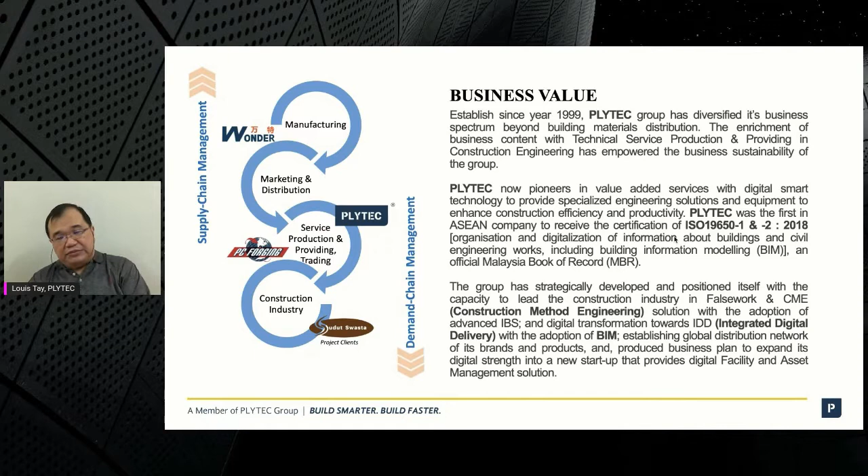We also have our mother company, which started our business 22 years ago, called Sudut Swasta. In this company, we do trading business for building materials. So this is our overall business value.

Just a quick look at it. But today, what I want to talk about is to introduce our core business, our products, and how it links to smart technology, about prefabrication, modular design, lightweight, things like that.

This is our core business, described under different brand names, but all under the Plytec flagship. We have Plytec IBS, which manufactures equipment for formwork, temporary works, and access purposes. Wonder comes under IBS as one of the flagship partners. Plytec Formwork is known for providing equipment and technical service solutions.

Sudut Swasta has been in the market for many years. It's one of the pioneer or established companies, 22 years doing building material distribution and trading. Under Sudut Swasta, we have a very established brand name called Plytec Fencing, specialized in modular fencing, wire mesh fencing.

And then, like I mentioned, we have PC Forging. This is a PPVC, prefabricated pre-finished volumetric construction solution delivery partner. We do all kinds of bridging, providing technical service, accessories, even customized equipment for our partners and clients to do PPVC productions. So we'll talk about it one by one.

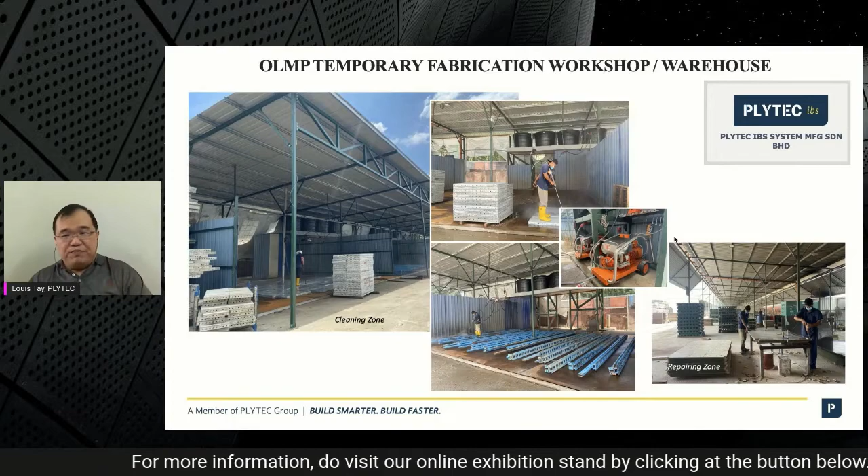Under the whole Plytec IBS flagship, we do multiple services. For example, formwork, SCP, formwork refurbishment, repair, refabrication, recalibrations. We have a full facility and a huge stockyard managing this.

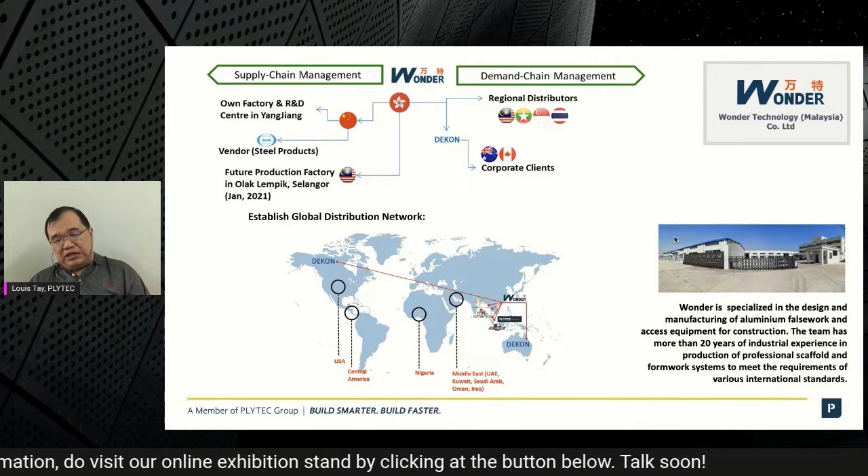Currently, the Wonder setup is in China, and from China we export to ourselves and all over the world. Very soon, by next year, we will set up a production capacity, enlarging the China capacity in Malaysia as well.

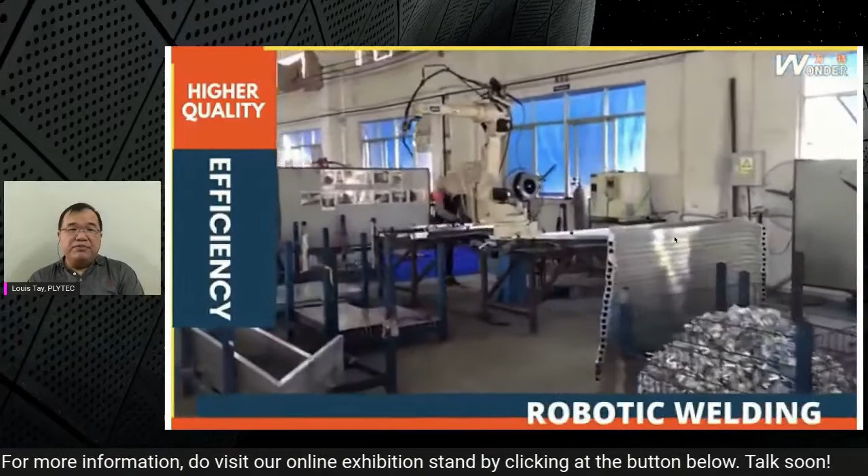The following video is just a view into our Wonder factory. It is a medium-sized factory, however it is highly automated. That is the direction of what we invested in. We are one of the earlier batches in this manufacturing of formwork and access equipment who started into 100% robotic welding.

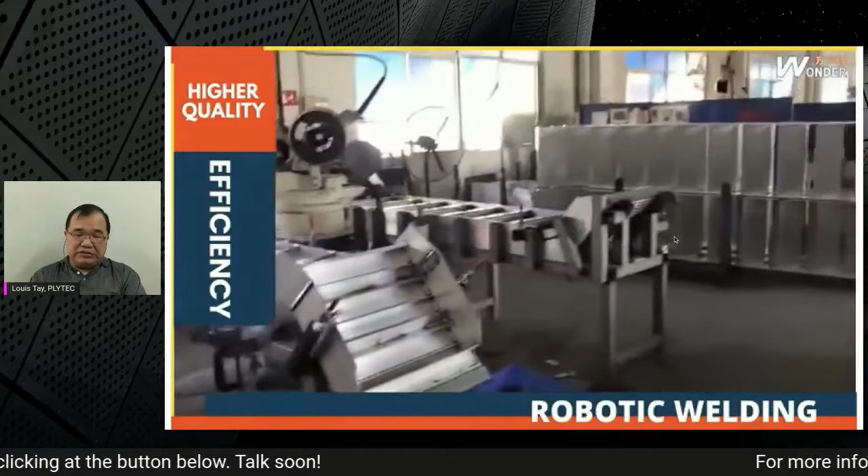This actually helped us to cut down a lot of manpower. Even in China today, due to the pandemic, manpower is a crisis. Even our factory is having a challenge and difficulty finding workers. It is going to be the same situation in the whole world.

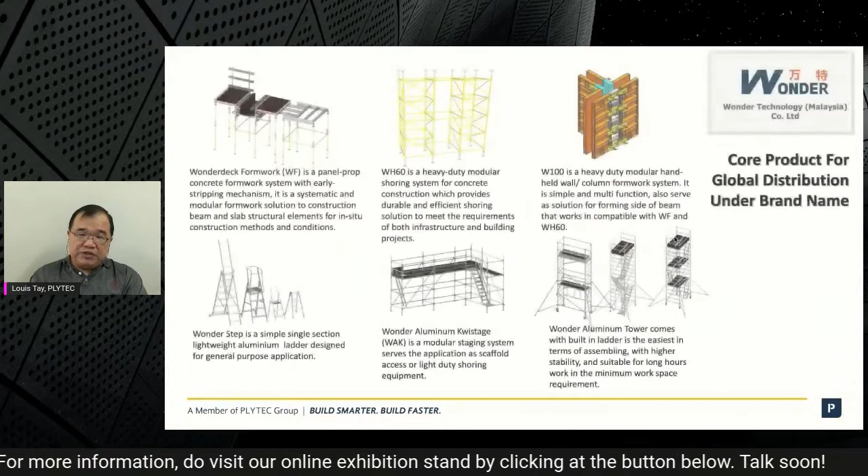Simply because the pandemic opened up new jobs and new job requirements in the e-commerce sector, young people choose to go into that segment rather than going into the conventional business. So all the industry will be facing the same problem.

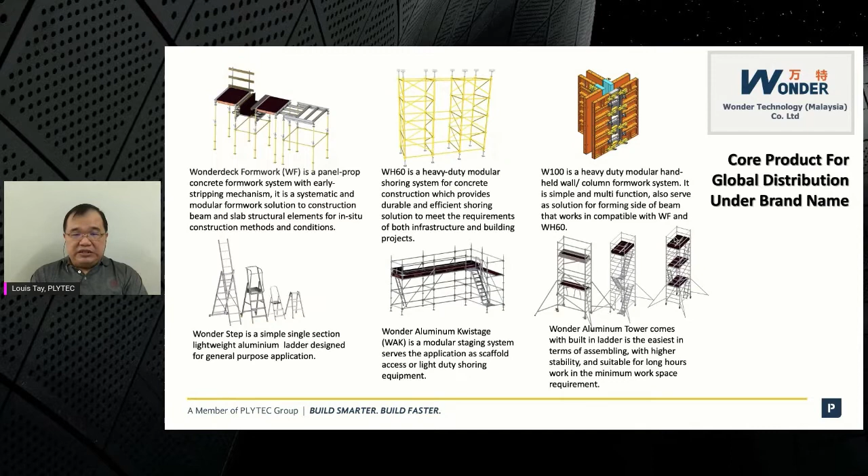It is the intellectual workers we need to support production planning and production supervision. That is the gap we are missing, to the extent that even the local labor group will also be missing, as they have a choice of going into other businesses. This is a situation we will continue facing, including the professional service industry like architect and engineer offices, and also the construction industry. We are not only faced with the shortage of labor, but the mobility of labor at this moment is also very much restricted due to the pandemic.

On the other hand, we are also facing the challenge of young graduates who don't want to choose to go into conventional business, like becoming a trainee engineer, a site engineer, a project executive, that kind of role. They always have a choice of going to Grab car or Grab food instead, because those jobs give them a higher starting pay than a conventional business.

But what they do not know is, yes, you enjoy free working hours and things like that, but it will stagnate at that level. Whereas if you start as a young engineer at 3,000 in a construction or design office, after 3 years you are at 5 to 6,000. With Grab, you can start at 4,000, but after 3 or 4 years it's still 4,000. Not to mention after 10 or 20 years, can you physically sustain that kind of burden doing this physical work?

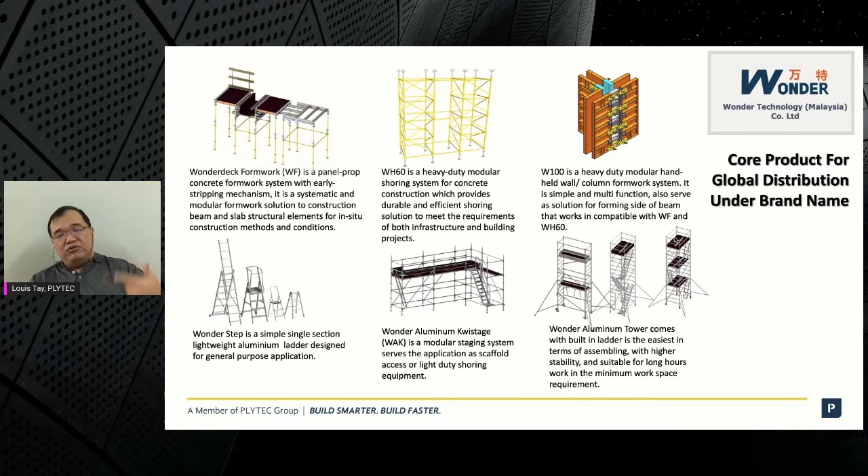So that justifies for us to go into industrialized building systems, to use more technology and equipment rather than labor and manpower. It's more justified for us to have something prefabricated rather than requiring a lot of shop drawing processing and detailing at the production site. Because of the challenges we are anticipating in the future human resource market, we need to overcome this by adopting technology.

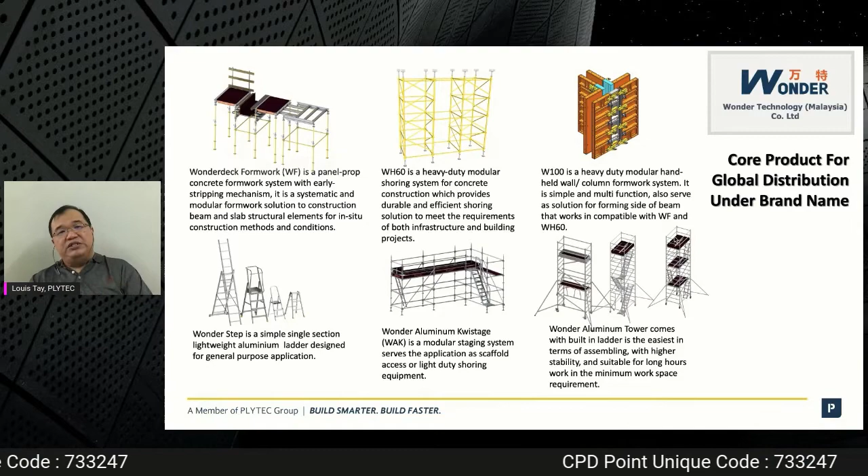These are some of the products we have produced, and the latest, which we did quite well for the last few months, is our solution we call the Plytec K21 Mobile House. It's a prefabricated, lightweight building system, and it is very ideal for construction projects to use as a centralized workers' accommodation.

Currently we have 4 projects in hand. One we are constructing for 1,000 plus capacity, another we are constructing 2,000 capacity labor quarters, another 2 are smaller, and we have completed another 2 recently.

The beautiful part about this lightweight system is that when it is mobilized to site, everything is fixed by dry construction.

It is so lightweight that even erecting a 3-story building involves no craneage. Everything can be put up by some workers. Of course, if you use craneage for 3-story construction, it will be much easier and you'll use fewer workers. But anyway, up to 2-story, we have been putting up a double story in 7 days.

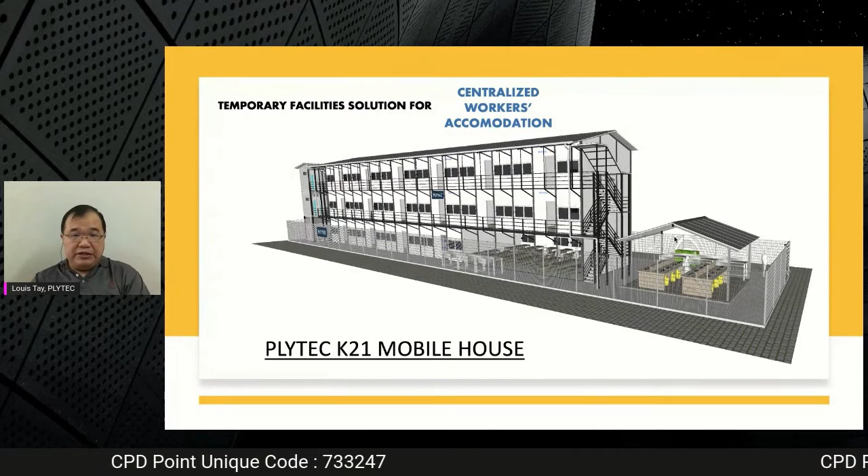Everything I told you just now is under our manufacturing, which is Plytec IBS. Under that, we have our international business, which we supply internationally, called Wonder. Locally, we are more known as Plytec Formwork, and a lot of people have come across us, a lot of projects you've seen everywhere in town carry this name. Plytec is actually undertaken by Plytec Formwork with our equipment and service. So what is Plytec Formwork?

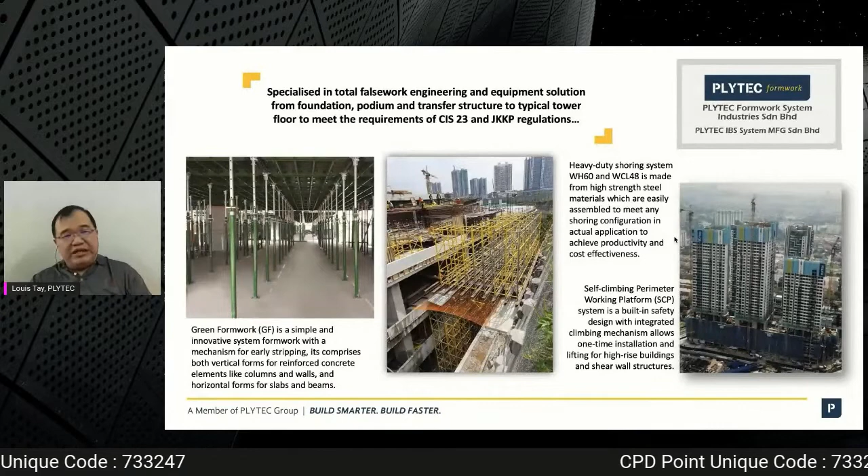We are a company specialized in falsework engineering, temporary works, very much into shoring systems and formwork systems. Our system can also do scaffolding. Over the years, we have done a little scaffolding, but we are capable of doing it.

But what happened is in the last 5 years, the market also saw transitions in terms of regulations and control of scaffolding material being used. Now, as of this year, actually last week, the regulations and standards for the use of scaffold and falsework or shoring have been further strengthened under the revision of CIS 22 and CIS 23, which cover the safe use of scaffold and falsework in construction. These two standards have been tightened and revised.

Last week or two weeks ago, the fourth schedule incorporated this under Act 520. These two CIS carry enforcement power, and are actually listed in the statutory enforcement list of the fourth schedule. So this is something that's going to change. We expect more proper, safer practice of this falsework in the market.

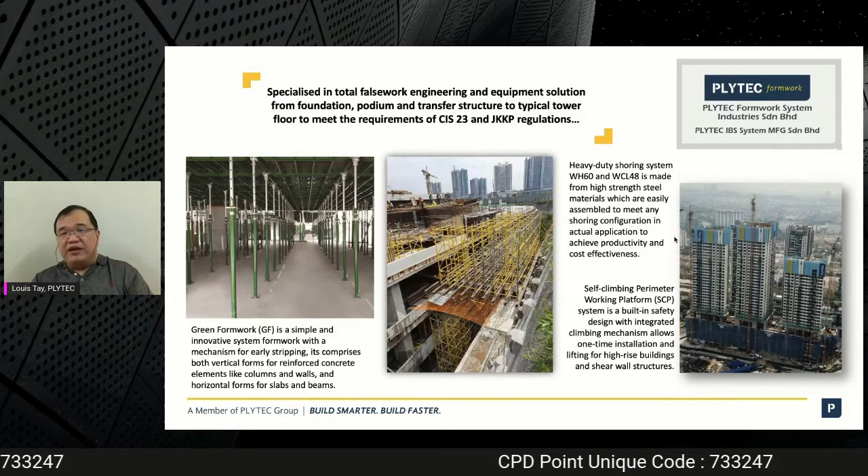I can tell you Plytec is already ahead of it. We are already preparing for this, participating in this very closely. So these are some of the things we do.

This is called SCP. There is also a new guideline coming out by JKKP and Master Builder, and now it's going to be called SCP-PS, self-climbing perimeter protection screen. But in Plytec, we have been calling it SCP for years because we shortened it. This guideline is coming out also.

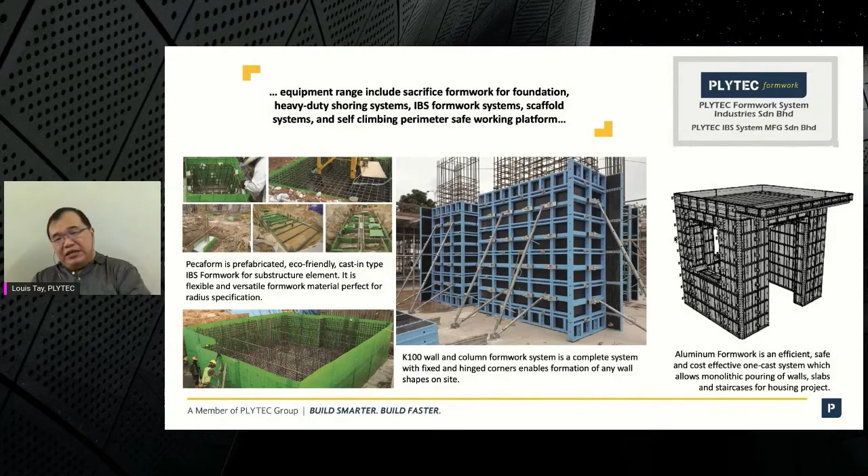So we expect the market will become more regulated, more best practices can be shared, people can do it more productively, and achieve higher safety standards. This is what Plytec Formwork does. We have multiple solutions, many products, and practically we are a one-stop solution center. We call it from toe to tip, from your pile cap to the tip of your tower.

We provide all the formwork and shoring solutions. For substructure, we have left beam formwork, Pecaform plastic reinforced formwork you live in, and it's very fast, gaining popularity also. Then from podium, normally big span structures, we have a very famous green formwork currently, almost used in all the podiums. 50% of podiums will use this kind of formwork system as long as they use a simple flat slab design.

We have been the key player in building transfer floors. We do a lot of transfer floor because it's heavy shoring, requires a lot of engineering, and we are very good in that area. And of course typical floor, most typical floors use aluminum formwork, which we also do. We don't do a big chunk of that market, just a small market share. However, our SCP, we are major. We took the majority share in the market, and we actually do it very well.

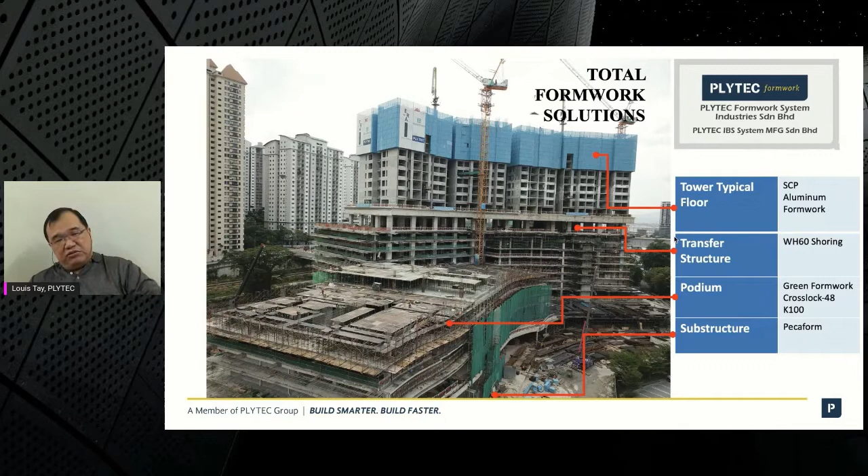So we have our reputation, and we are a trusted brand in SCP and in a lot of our systems. Normally we provide a client a one-stop experience. We deal with everything for them so that they do not need to source here and there. So finally, PC Forging is a delivery partner for precasters who do prefabrication construction, precast production.

So we do multiple solutions. First of all, we do detailing. These are some of the detailing work for jobs we did in the last 2 years, and these are all PPVC. You can see the precast is in 3D formation. We use BIM software to produce the detailing for them and the coordination. So this is one of the services.

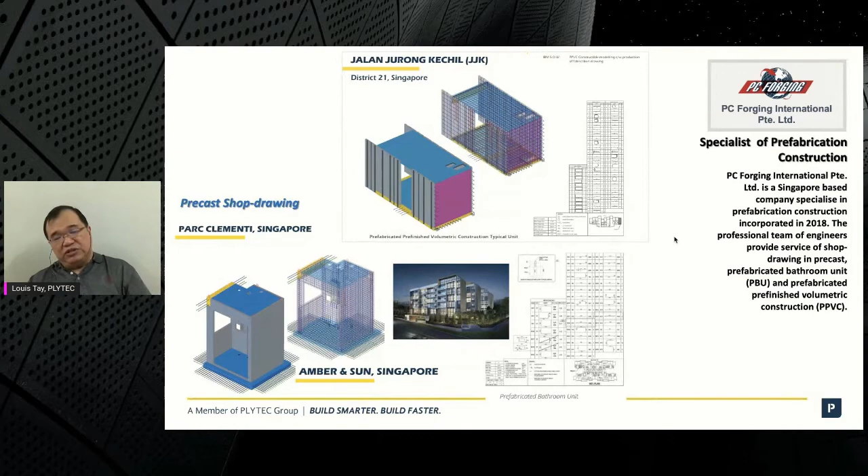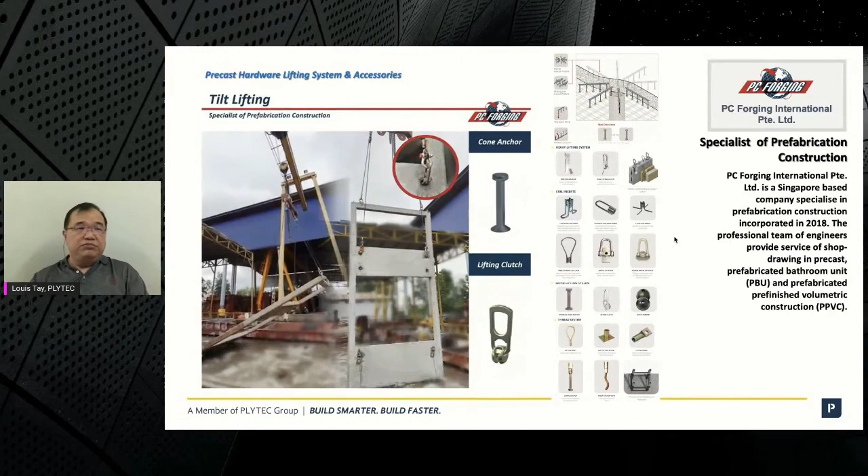But what we do more is actually under PC Forging, we have multiple lifting and connecting solutions. This is what we also do, so we supply this. At the beginning of the PPVC 3D precast, the precaster uses the formwork system that does inverted casting, because the element is casted inverted. It means top down, so it has to be turned 180 degrees over.

In the early days, we coupled with a precaster to help them solve the solution of how you turn a 10 ton to 30 ton 3D precast concrete element over. So we actually designed, constructed, and supplied this equipment. Our first version was P30, up to 30 ton, and then the newer version was P50. So this is some of the things we do. We specialize in this.

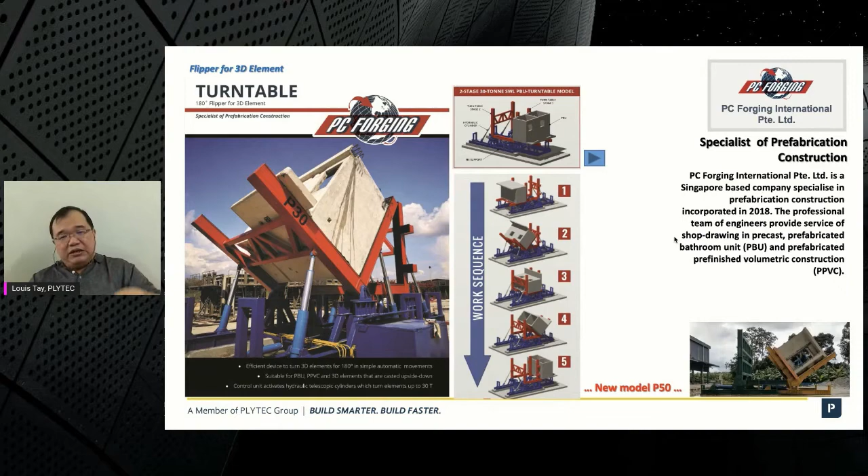We help in the production planning. We provide detailing. We don't do the production. What we do is we solve the production challenge. So this, so far for PC Forging, has been the partners and the people we have been working with.

And of course, this is one of our earliest brands. Plytec fencing, I think it is a well-known brand. Over many years we always took part as a brand by itself in this architects exhibition, but this year we combine it under the Plytec flagship.

So we have multiple solutions. Whatever wire mesh or prefabricated fencing, modular fencing you think of, we have. We even have aluminium fencing. What you see on the right hand side is the more common one, the anti-climb one, installed in the other direction. The other type, which is not that common, is also available. I even forgot the name of this one, what a shame, sorry. So this is also one of our projects. We have multiple solutions.

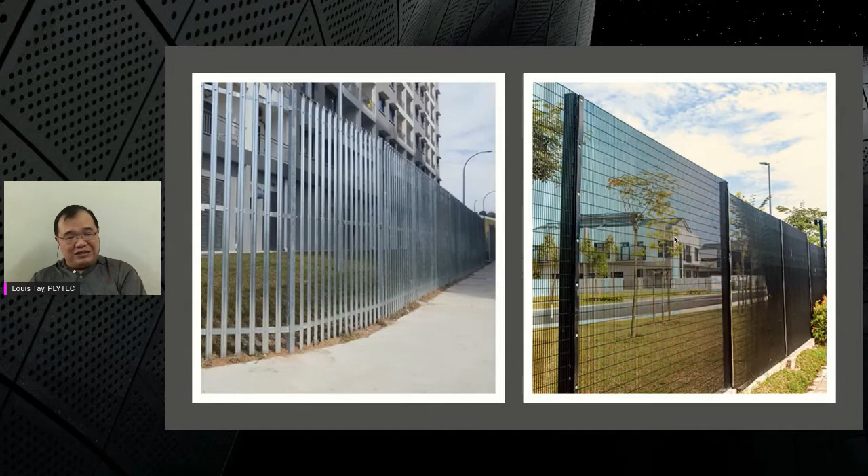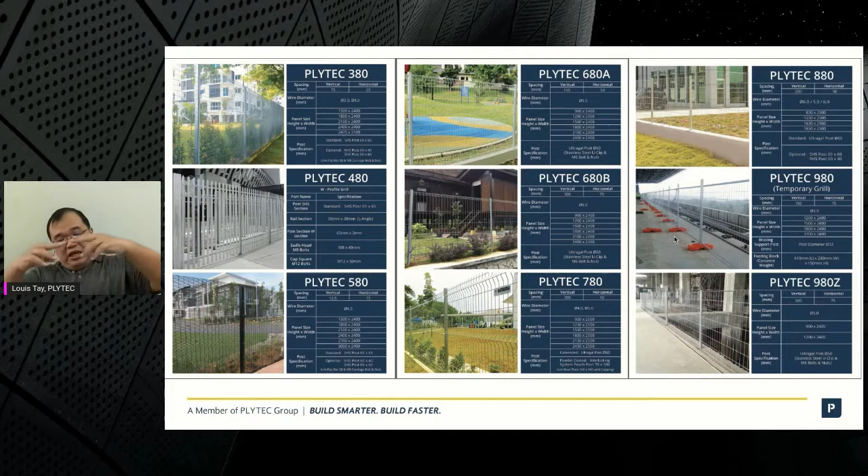Taking a glance at the overall product lineup, we call it a series. We have from Plytec 380 all the way to 480, 580. 580 is the most established one because it's also called anti-climb - the mesh opening is so small that fingers cannot go through. Then we have all the way until 880, 980, which is for temporary works, and 980Z. Those are temporary fencing - you can put it in, take it out, put it back. 880 is the fencing used a lot in public areas in Europe because it has double wire on the horizontal, and the vertical is cut and flush.

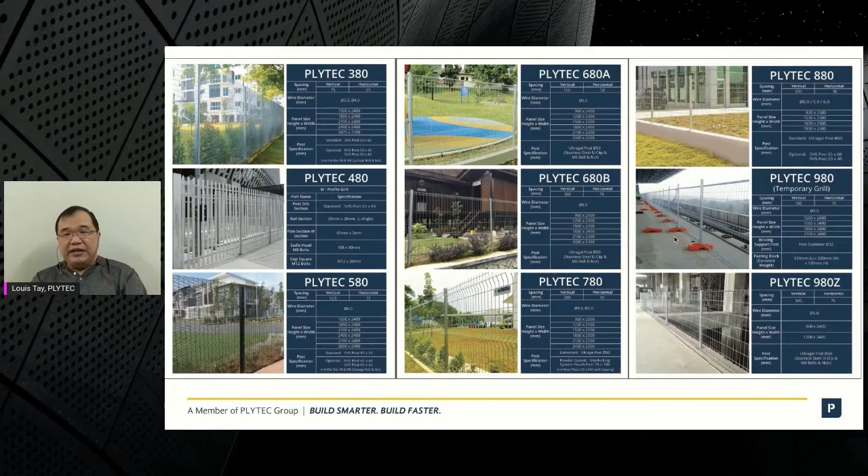It will not hurt people, especially children, when you have a low fence in the park or in a public area. So generally, these are all that we have, and for this 30 minute session, that's all I will share with you.